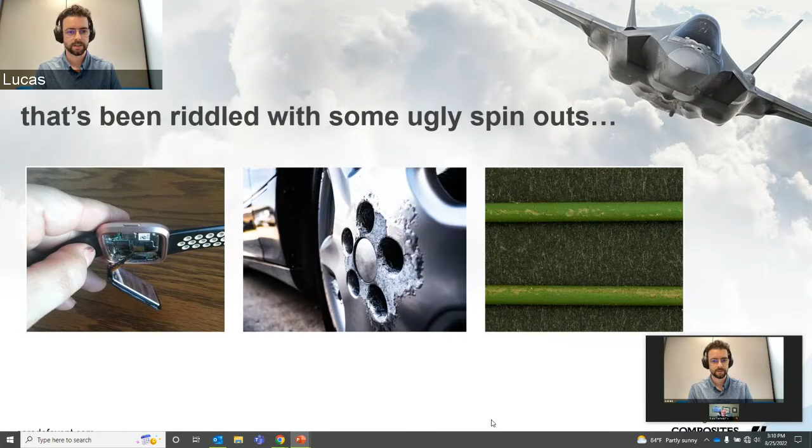This manifests itself in some very real world spinouts. Your smartwatch screen pops off, your newly refinished wheels bubble and don't work anymore, the coating on your medical tube or catheter starts bubbling and peeling off. This is real.

And when this occurs, the Twitterverse is not very kind—the forum warriors, the keyboard warriors go crazy. So even if you have a super small percentage of failure in your overall production run, guess what? That makes it to a pretty unforgiving audience out there in the real world. And it's not necessarily fair to the manufacturer, but it is the world we live in.

So guys go crazy on the forums: hey, my cell phone screen fell off, it's no good. Or, I just bought my new Ford Bronco and I've got this tiny little chip in one corner, and this is crazy—I just spent 80 grand on this thing and Ford couldn't even ship it to me on time. Like, what the heck. So this is what we've got to deal with—that brand image problem, which can be pretty damaging.

So in each of these high profile cases, the issue really isn't a design flaw. It's not that our adhesive bead width isn't thick enough, or that the way we've designed the joint so the load path goes in a specific direction is incorrect.

It's a bonding problem or adhesion failure. It's some failure in the surface, where the surface is different than we wanted it to be at the point in time that we put our coating or sealant in contact with it.

In fact, about 90% of all the adhesion failure issues that we see out there in the world are related to surface problems. And it's not just, hey, we didn't get it clean enough today, or the prep was wrong. There's a human and organizational factor at play.

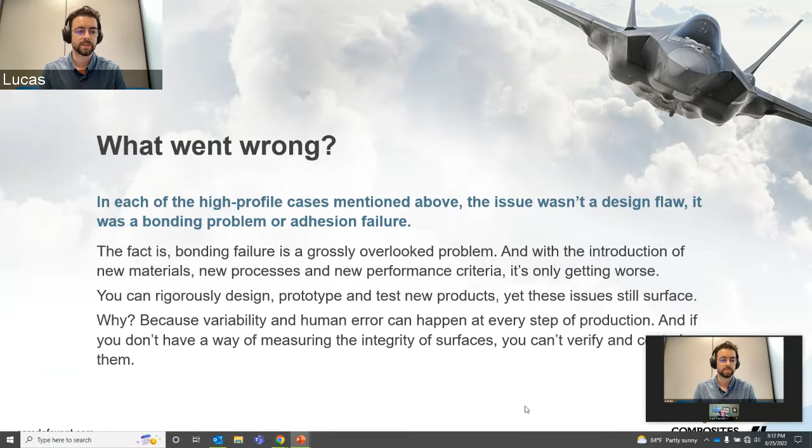So these failures, what do they lead to? Scrap and rework expenses, warranty claims, reputational damage. And then process engineering or quality engineering, sometimes development, are now running around trying to figure out where the cause of this failure is and how to implement a corrective action.

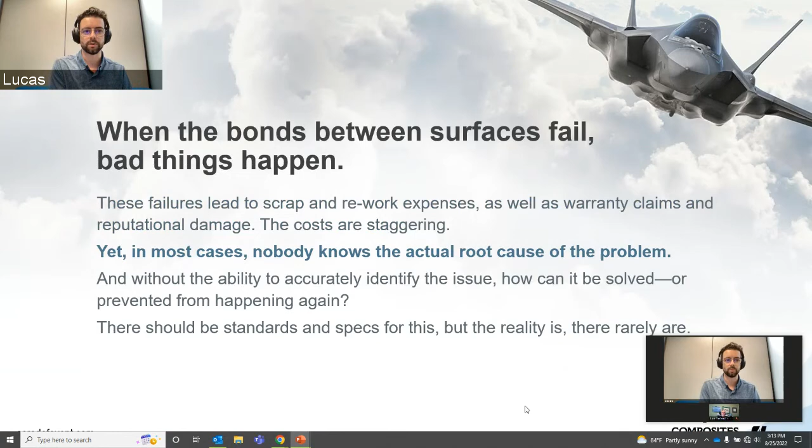Not only that, say I'm the manufacturing or process engineer, I now have to create a large report that takes weeks to deliver to management on what the problem is, what the fix is, and how much it's going to cost to fix it. It's a big time suck away from doing the work we're supposed to be doing, regardless of our function.

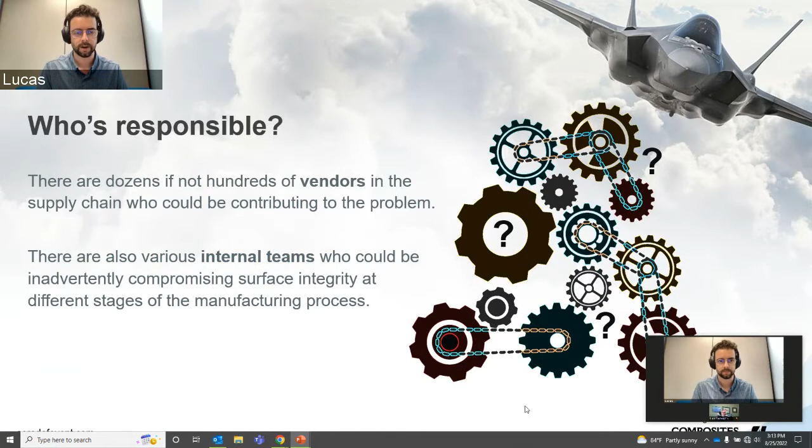Getting to responsibility can be difficult. Who is actually responsible? Is it the vendor? Is it the shipping company? Is it the receiving guys in shipping that left it sit on the dock during winter? Who owns this problem? We want to avoid finger-pointing situations like this.

So the visibility to the issue for surface chemistry, plus the experience to know what to do with that information, is what we call surface intelligence. There are new tools available, new analytical capabilities, and expertise available that can give us insight and the ability to monitor and analyze these variables in real time.

It can give us the ability to increase control over our processes. It gives us a common language to talk about critical adhesion issues across the organization, which we find to be a major barrier, especially with a globalized supply chain. And then the ability to not just diagnose and fix them, but actually prevent these problems from happening in the first place, which really starts on the development side.

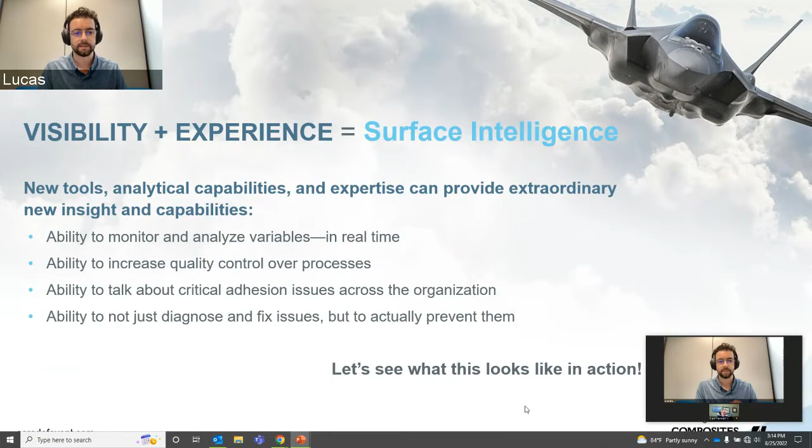So let's see what this looks like in action.

What's really important to think about is we've got three key inputs to a reliable coating, sealing, or bonding application. It's the chemistry we're applying to the surface. Is it correct? Usually the Henkels of the world, the Solvays, do a very good job controlling monomer ratios, and they're not shipping out bad batches of adhesive or coating too often.

Almost never. We have to control the second input, which is how we're going to apply that chemistry to our substrate - the cure profile, environmental conditions, fixturing, pressure. There's a lot of physical and mechanical things there that need to be aligned. The third thing is the substrate we are going to apply that coating to - do we have the right surface chemistry to play well with what we're putting together?

So if we do those three things, we're going to get a reliable and repeatable output 99.999% of the time. It is going to work as designed, right? So that's very important.

Manufacturers do 2 out of 3 pretty darn well. The Henkels and Solvays of the world do a great job controlling the product they're delivering. We do all kinds of monitoring around fixturing and environmental conditions when we're actually applying that - cameras behind robotically deployed sealant to make sure bead width and color is correct, mixture nozzles, all kinds of stuff. But we're not really tackling surfaces.

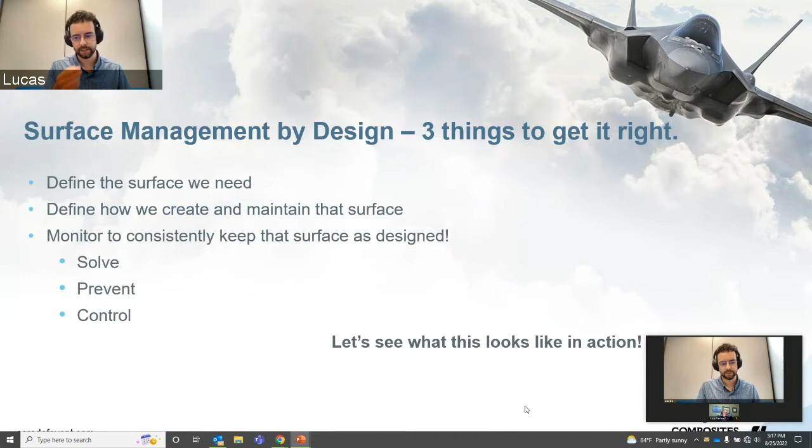So we've got to be able to solve for the problem if it occurs. We want to prevent it from happening in the first place, and we've got to have a good control plan in place. So let's get into some of the chemistry here and what's going on with these surfaces as a whole.

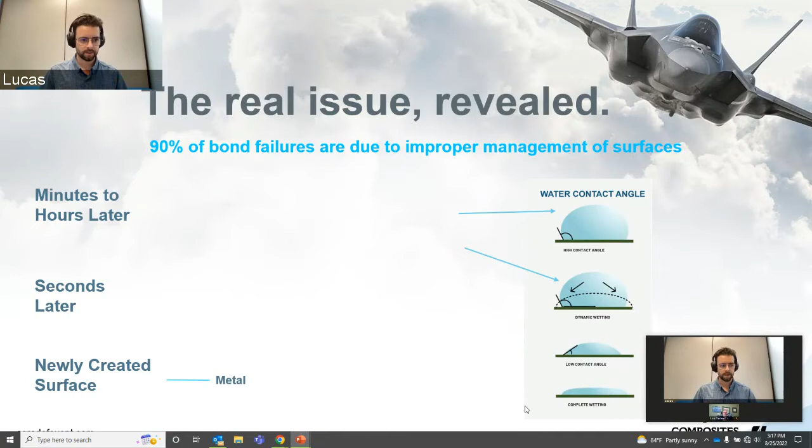So, what is a surface? We've got to define what is a surface for these applications. A surface for a bonding or sealing or coating application is basically the top 2 to 10 or 20 molecular layers on a given material.

If I can see a fingerprint on that surface, that's like 10,000 molecules thick. The region that we care about is totally invisible to the eye.

What we're showing here in this diagram, just using metal as an example, when I create a metal surface, say through machining or abrasion or laser ablation, I've fractured molecular bonds. I've literally ripped some portion of the bulk material apart, and now I've got all these reactive sites.

Within milliseconds, I get an oxide layer that forms, I get some water vapor that gets on there, and then eventually I start getting some contamination, some adsorption from the environment or from handling, usually in the form of hydrocarbons. Every time a molecule comes in touch with that super fresh surface, you lose some of that reactivity.

You lose a reactive site, literally used up. You got nothing to work with there.

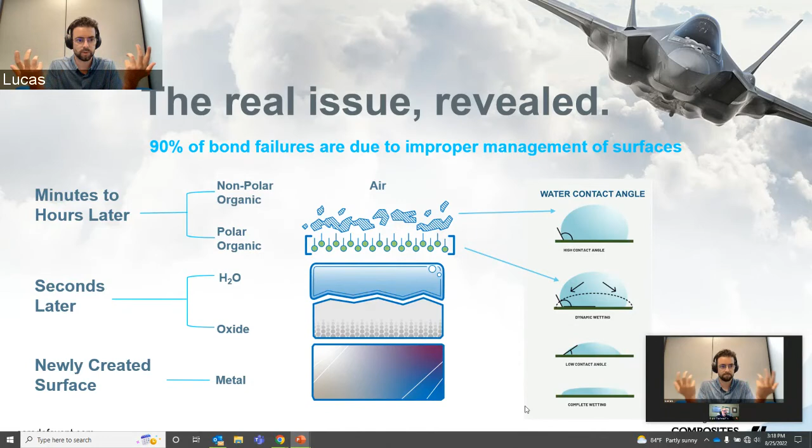The jargon that you'll hear as you go out and research around this is the term surface energy. And surface energy simply is a phrase that describes the total amount of chemical reactivity that's present on a surface at a given point in time.

Certain materials natively have more surface energy than others, depending on their chemical makeup. Crystalline materials, glasses, ceramics, metals, they tend to have a lot more energy. That also has to do with specifically what they're made up of, than, say, polymers. And polymers follow a little bit different scenario.

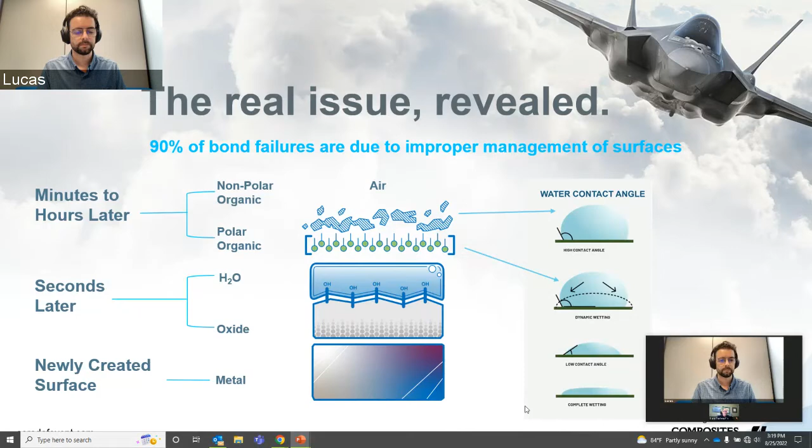So every material goes through this decay curve. I've got surface energy on the y-axis as a function of the elapsed time from surface creation on the x-axis. When I create that fresh surface, and if it's a polymer, it's typically through surface treatment.

If it's a metal, it's typically through cleaning or abrasion or something like this. I'm going to start with a relatively high energy level. It's going to immediately start to decay.

At some point, it decays so much that you don't have much there to work with. You don't have much reactivity for your adhesive or your paint to even appropriately wet the surface. Where that is, is system dependent. How fast this happens is material and environment and system dependent.

That's the answer for everything. Every engineering answer is 'it depends' to every question. But this is very important to understand: where are we on this scale? Where do we need to be?

This gives us a baseline to function from. When does my system work? When does it start to kind of get iffy? When does it start failing completely?

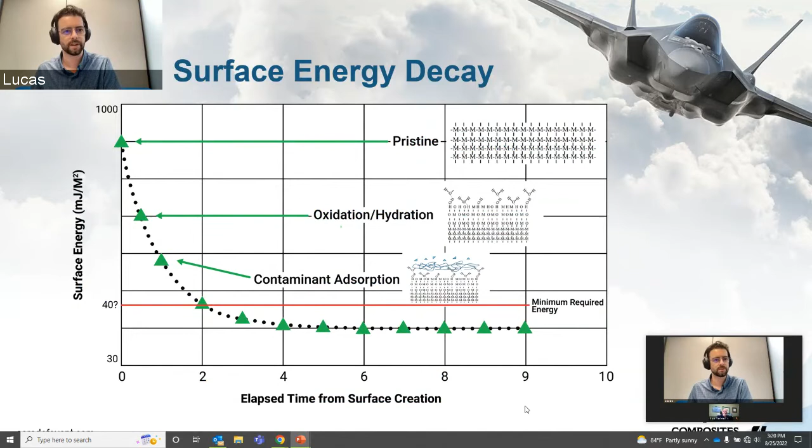So let's take a look at polymers here. When I'm creating a polymer surface, it's pretty different. If I've got a bulk polymer that I pull apart, essentially two things can happen: I get some chain scission, or I can get chain pullout.

But there's fewer broken bonds. There's low chemical potential, low reactivity on these surfaces. They don't have much reaction to the environment. They're fairly stable.

But to be able to do something with them, we typically have to do surface treatment. Could be a plasma, could be a flame treatment, could be a corona treatment. Sometimes there will be primers that we'll use to help try to do this.

They also have high molecular mobility, so substances can really diffuse from the bulk up to the surface, like low molecular weight material can be a real problem. And that actually can be a real killer that we'll see a lot in, say, molding operations

or film operations. So it's a little bit different setup. The surfaces of these things basically look like spaghetti. There's not a whole lot to work with there unless you do something to it.

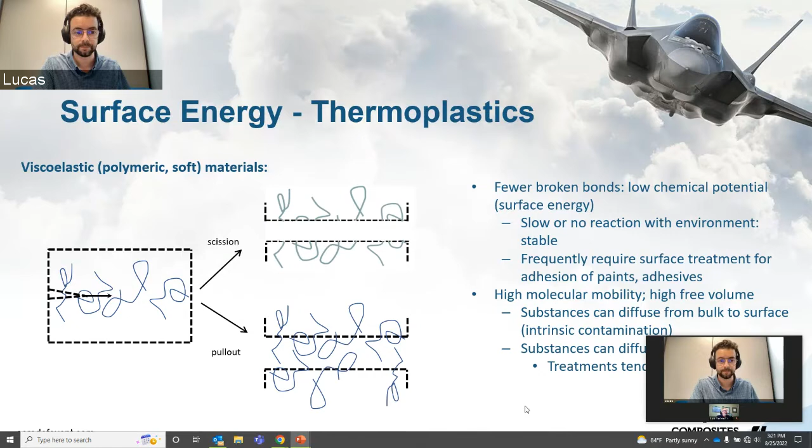The decay function here looks a little bit different because you're starting from a lower surface energy to start with. You surface treat, typically, and that increases its surface energy. And then again, it decays over some period of time.

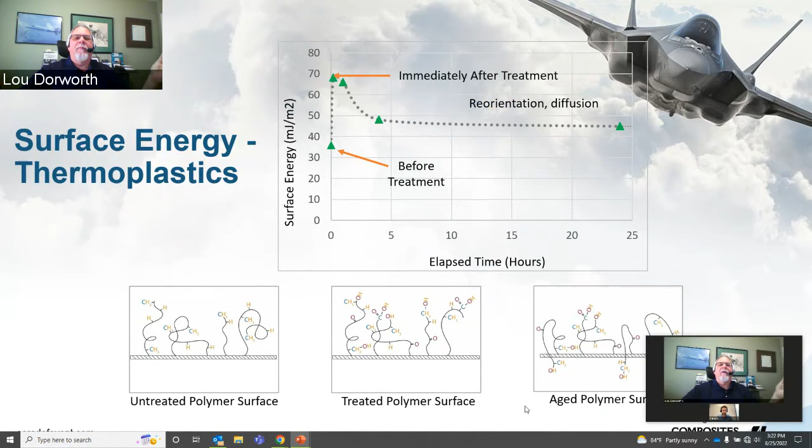Lucas, can you discuss thermoset polymers compared to thermoplastics? Thermoplastics have much lower surface free energy, so we're dealing with something slightly more than that, but still much lower than any metal. Yeah, much lower than any metal. So great question, Lou, probably one of the better questions I've ever gotten on a webinar.

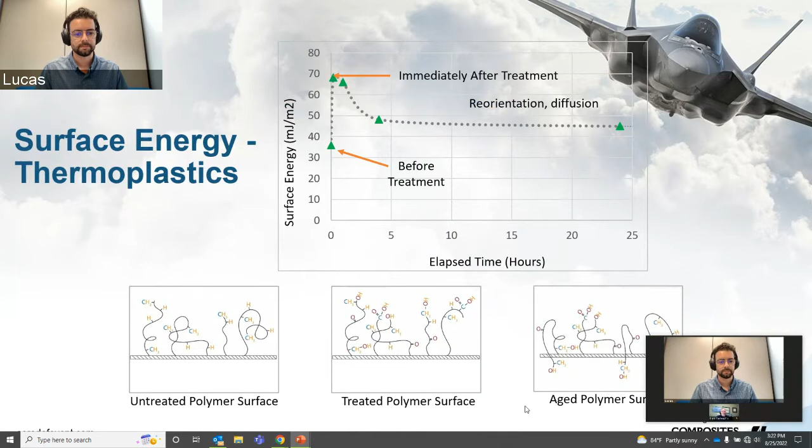The other thing you need to worry about with treatment is you can create reactive sites on the surface, but they can reorient down into the bulk. Now, to Lou's point, that's really related specifically to thermoplastics. But it's something to keep in mind. The point here is that these things are sensitive.

It's a super thin region and it's mobile. Things are changing all the time. So a surface that we care about for these applications is quite thin, invisible to the naked eye. Surface energy gives us a way to start describing how these things move around or how they change as we do preparation or cleaning. But how do we really measure them?

Traditionally, we've got a couple techniques. We've got FTIR. We've got vacuum techniques like XPS, X-ray photoelectron spectroscopy. We can do some chemical residue analysis, through say solvent extraction. We can do wetting methods like contact angles, and we can do surface roughness analysis.

Now, a lot of people do roughness post-prep because the common wisdom is we need to roughen surfaces to get good bonding. It tells us nothing about surface chemistry, simply tells us if we hopefully got the surface a little bit rougher. It can be important, but usually a secondary effect for bonding, not a primary effect.

The challenge with some of these, of course, is that things like FTIR and XPS are laboratory techniques. We can't deploy them out in the field. You need to have a really trained operator to be able to use them. You can get great information out of them, but they're not super practical on a day-to-day basis.

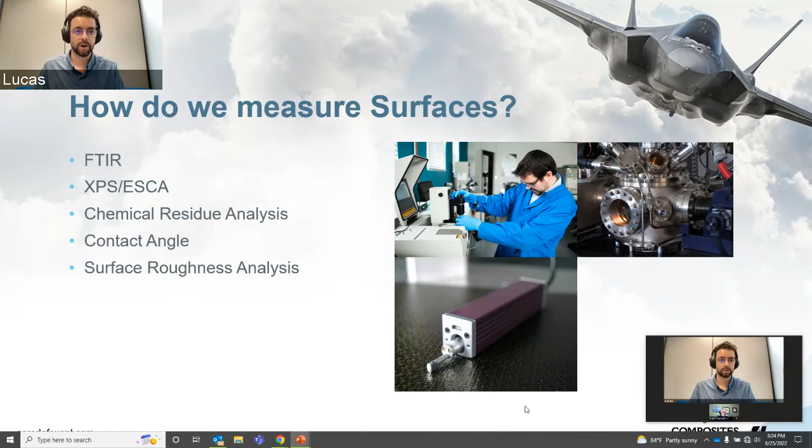So we've got another poll here. How are you guys measuring surface chemistry today? You've got about 60 seconds on this. Do you guys have access to FTIR? Is there an XPS around that you get access to? Contact angle, chemical residue, surface roughness, or are you not measuring at all? And how is that working?

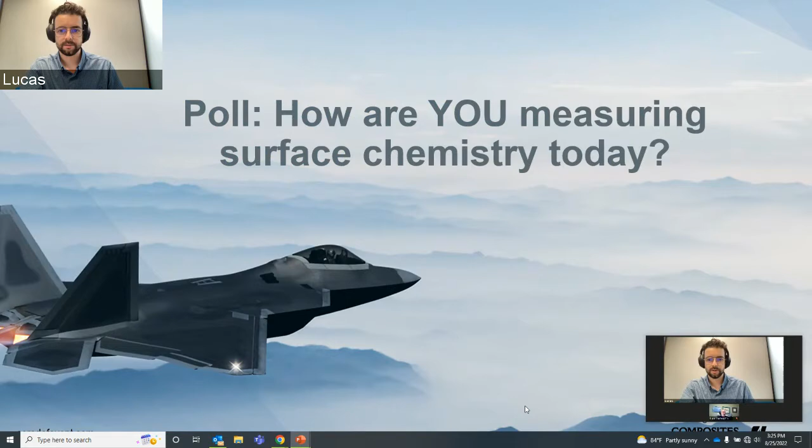All right, okay, we got 4 votes for chemical residue, 0 for XPS, one vote here for FTIR, and a few for we don't measure. Good, thanks everybody for answering that.

Okay, a couple things to consider with some of these measurement techniques. The FTIR technique matters.

Most people that have access to FTIR are doing ATR. It can be good, good for compound identification, but the problem with ATR is you're sampling down in the bulk material, like a micron or two. So it's actually not telling you—if you remember, we really care about the top 1 to 15 to 20 molecular layers of that surface.

ATR samples too deep. You can use grazing angle spectroscopy, but you need a reflective plate, so it requires you to basically wash a part off in solvent, collect it on a reflective plate, and then you can get real thin film analysis on what's there. So it can be great, can be quick, but not always the way to do it. Almost everyone's trying to do ATR, but it's not really even sampling the region that you care about.

Another thing is SEM.

A lot of people have access to SEM. You get these incredible images. I don't know if folks here have ever seen those insane images of an ant head, black and white or green, where you can see the individual hairs on the ant head. Those are done in SEM. It's always awesome. A lot of SEMs now have an EDX attachment, which can give you bulk elemental composition. But again, you're getting like 2 microns down into the surface, so you're ignoring that actual region that you care about a lot.

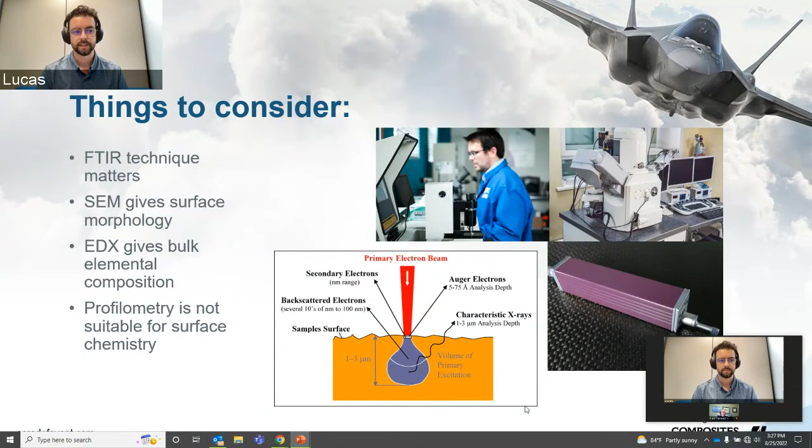So let's talk wetting measurements. These are the most deployable in manufacturing. They're literally the easiest to use. Traditionally you'll see dyne tests done a lot in polymer processing, like film processing and molding. Dynes have been around forever. Inks have different surface tensions. You paint them on the surface, count to five, and watch if they bead up or wet out a bit, to get an indication of the surface energy of the part.

Water break check is basically the most ubiquitous way for the aerospace industry to understand if they've got clean metal parts prior to PAA, and prior to a lot of different things, but many times prior to coating or metal bonding. Very much a binary, go, no go. Usually the company's relying on maybe someone named Todd and someone else named Sarah who've been doing it for 35 years and they trust them. So it's certainly subjective and certainly not a 21st century solution.

And then more and more people now are starting to use water contact angle, because this is a way to get to a quantified water break, which allows you to get a lot more accuracy, sensitivity, and flexibility, and gives you data, something I can port into a computer and start graphing. So it's absolutely the way to start looking at it.

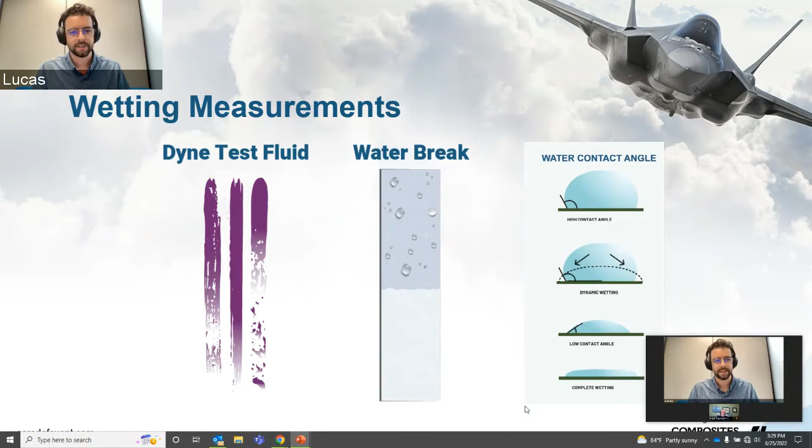So let's look at some of these deployed. Typically, surprise surprise, we do make some of these. This is one of the things we do. They come in handheld versions, they come in automated versions. We won't spend any time on this at all, but we will get into the data next.

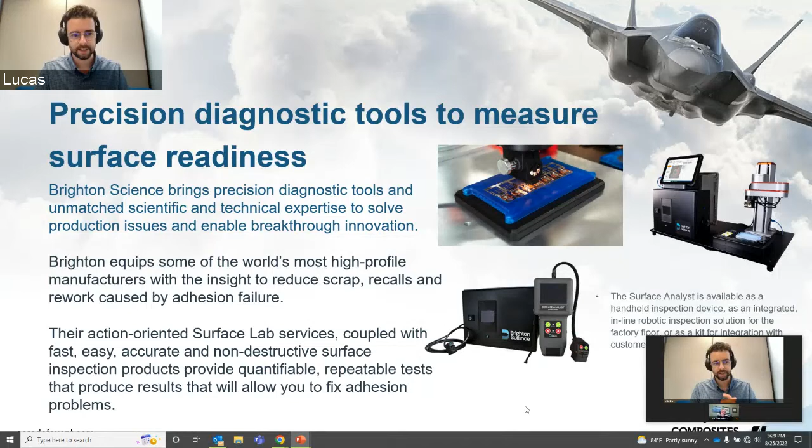So why do we like the water contact angle technique? One, it's sensitive. It is as sensitive as XPS. It's literally the most surface sensitive technique available today that I can just deploy on anything, anywhere, in atmosphere. As an example, here we've got some nickel alloy that's dirty. It's going through a stamping process. It's dirty. The manufacturer here is trying to evaluate: I need a new way to clean this that's environmentally friendly. How do I know that this new solvent package is going to work for me?

We can get to a very objective measurement of metal cleanliness here by creating a carbon and nickel ratio in our XPS system, and we can correlate that directly to a water contact angle result. That carbon and nickel ratio is basically how much carbon signal we're getting in relation to nickel on that surface. You can see when I'm at an 80-degree contact angle on the right-hand side of the chart, I've got a very high carbon to nickel ratio. As I start cleaning this nickel through different techniques, my contact angle goes down, down, down, and my carbon to nickel ratio goes down. It's pretty darn close to a 45-degree line. It doesn't get much better than that.

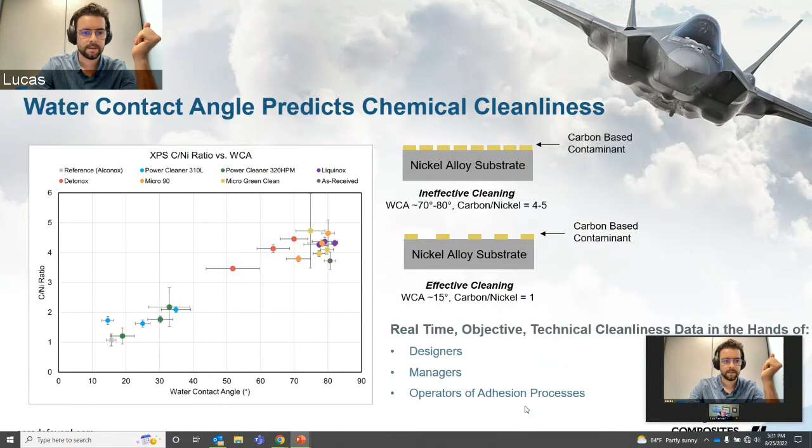So one of the reasons we like this water contact angle method is that it's sensitive. It's accurate—it tells us when our surface is changing, which is really nice. It's not just for metals, though, as we'll see here in this next slide.

As you'll see in this slide, we can map our contact angle on the y-axis as a function of the atomic percent oxygen that we're putting onto this polyethylene through plasma treatment. Very similar curve shape, right? So we get this in two seconds, and it's super sensitive and super accurate, and anybody can do it. So it's a very nice thing.

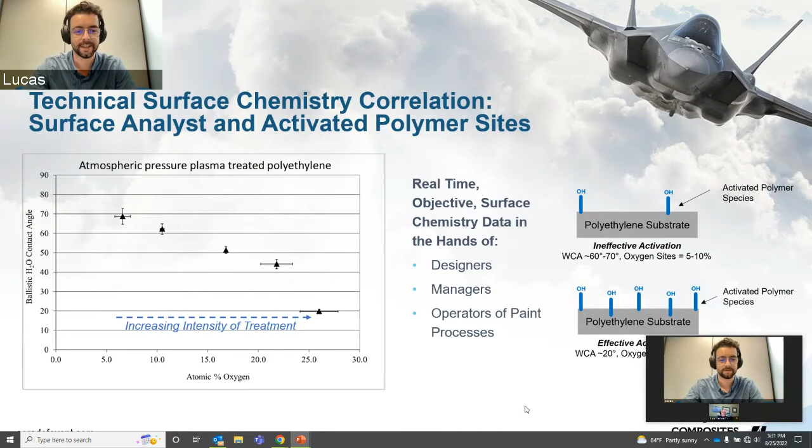When we start putting this to practice in two ways: one of the things we look at is its sensitivity to contamination, as well as how we correlate our surface chemistry, our surface condition, to bond performance, to the fundamental performance of the joint.

And we end up getting charts like this, which give us a lot of confidence that if we design our process well to create a particular surface chemistry, part after part, shift after shift, operator after operator, that gives us a very specific water contact angle band that any movement in that band can alert us to when things are moving out of spec.

Just like we'd put a torque specification on a fastener, we can put a specification on surface chemistry for the factory. On the left-hand chart, we're showing the technique sensitivity to silicone. Silicone is probably the worst contaminant you could have floating around in a manufacturing facility that's doing bonding, painting, or sealing. It's insidious. It's everywhere.

It's in your lotions. It's on people wearing—I guess not many people wear Livestrong bracelets anymore, but it's in your Apple Watch band. It's all over the place. People buy silicone gloves, walk into the plant, and open up the box on accident, and all of a sudden now you've got silicone floating around.

The chart here on the left shows we've got our water contact angle on the left axis, the amount of silicone that we're applying to composite samples on the bottom axis, and then the atomic percent silicone on the right axis. And so what you can see here is once we get to 10 micrograms per square centimeter, we're up above 40 degrees.

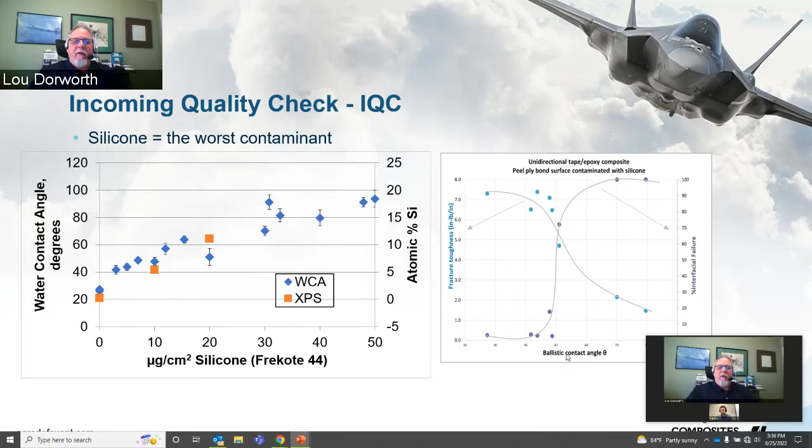We're using Frekote 44 here just because this is what we used in the experiment—it's easy to apply for the experiment. In this case, we're just trying to understand, what's the sensitivity of the technique to contamination, and what's the contaminant we really care the most about? Well, it's actually usually not hydrocarbon based contaminants. It's almost always silicones.

Now, every application is different. If I'm doing precision machining and cleaning of a medical implantable device, I also care about hydrocarbons, and I'm looking at a whole different level of clean. Yeah, that's how I would answer that.

Right, thanks Lucas. It follows along with our observations. On the right hand side here, we've got a chart where we're taking these samples and correlating the bond performance. Our contact angle is on the bottom axis, fracture toughness is on the left axis, and on the right axis we've got percent interfacial failure.

I saw Doug Decker was here listening today. He's seen this chart before, and it's a really good one, because what happens is that as we add contaminant to that surface and our surface energy decreases and our contact angle increases, what we see is our fracture toughness decrease.

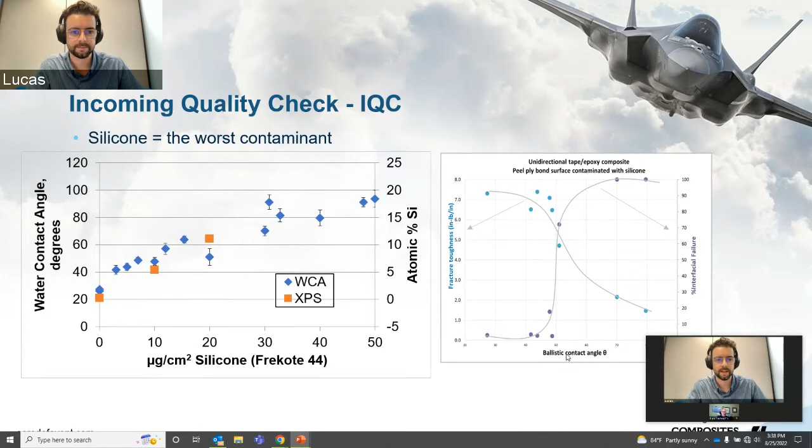We're going to be able to quickly screen technology options, right? What solvent package? Am I using plasma? Am I using a Scotch-Brite? Am I using a 220 grit? If I use a 220 grit paper, can they get anything from Home Depot, or do I need to actually specify what paper they're going to use? I won't spoil the answer of that one.

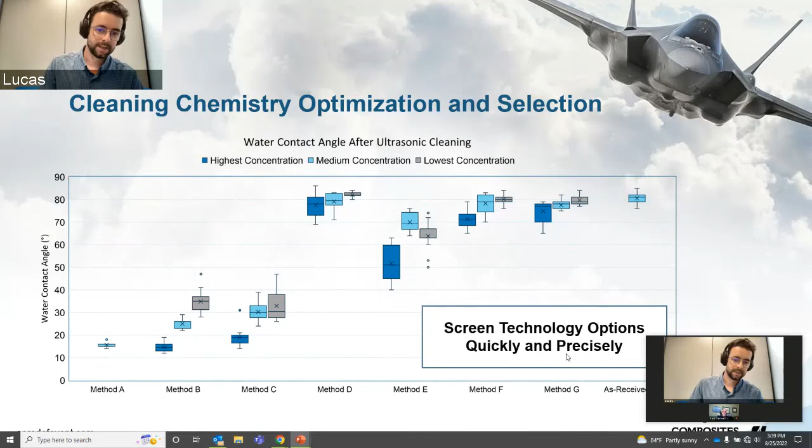And finally, the thing that we get really excited about, because this gets us to our prevention piece, is providing a data stream, right? Considering this is aerodef, and let's make an assumption that some of our attendees are in the aerospace industry, when we talk about digital thread, digital twin - this is where that comes to practice, this is where it comes to life. We get a data stream in the factory at the point of application for what's going on with our surfaces.

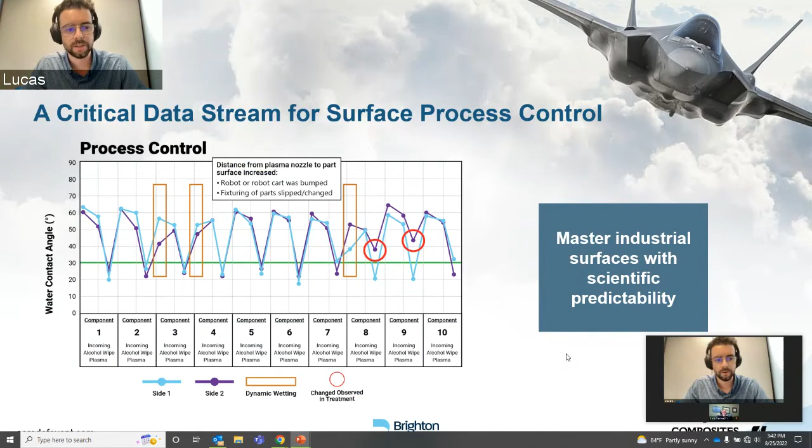So here we get to not only quickly scale a process that is doing things to the surface that are invisible to the eye, we get a more reliable assembly. We're solving a problem super quickly that would have gone undetected otherwise. And we get a critical data stream that's alerting, in this case, our advanced manufacturing engineers, that this is happening before it becomes a much bigger problem.

So we're going to tell two stories, and then we're going to start wrapping this up. A way that people are putting this surface intelligence data to practice. One of them, enabling a process development team to really overachieve deadlines.

Here we've got an automotive manufacturer developing a new electric vehicle. We had 4 months to select a cleaning process for wire bonding of the battery module. Wire bonding is very sensitive to metal cleanliness, so we've got to get something that's repeatable. If anyone here has looked at a Tesla battery pack, it's almost impossible to avoid these days - it looks like basically an array of double A's, and they've got to do wire bonding to each cell. That's got to be legit.

So we worked with them to quickly select methods, test, develop a spec, and then provide test results to correlate to what they wanted to ultimately select, which in this case was a plasma cleaning step - highly automatable, good for this kind of application. In half the allocated time, we were able to nail the process and say, this is what we're using, here's the spec, manufacturing team go ahead and start procurement, we can get moving. So we took that 4-month project down to 2 because we had that visibility and experience on what we needed for the surface.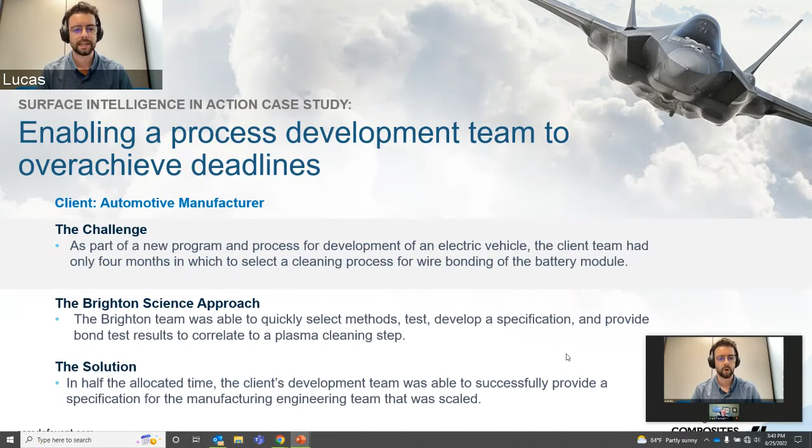This is one I like, near and dear to my heart - mitigating risk and changing human behavior with surface intelligence. This human behavior angle is so key, and anyone who's been around for a while knows how hard it is. They could probably count on one hand how many times it's been done successfully, and on all their fingers and toes how many times it's been done unsuccessfully, if not more. The human behavior thing is super important, but we don't get to change that without data and visibility as to what's going on.

What we did in this case is we went and started gathering data in the cleaning procedures during every shift, first, second, and third, to see what was happening. And what do we find? Third shift was deviating from the prescribed standard operating procedure - they were reaching for a different cleaner instead of the prescribed one. It was out there on the cart, it was available, it wasn't what they were supposed to use, but it's what they were using.

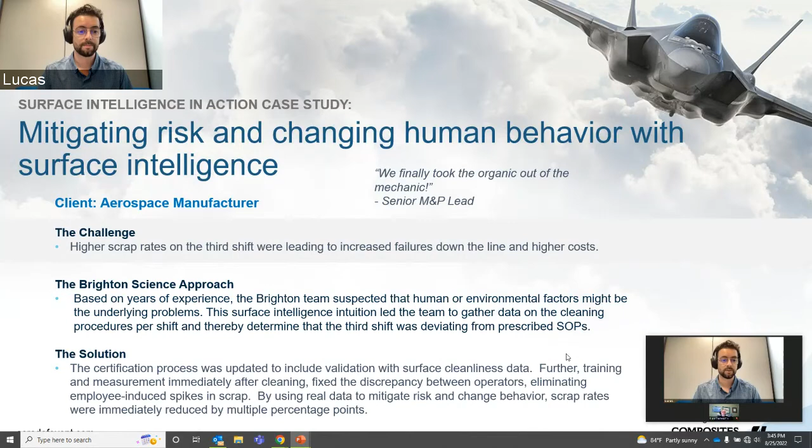So we discovered that after a week, and what we did is we helped update the certification process. We included some validation so that operators had to self-validate how they were doing the procedure. We also implemented better training and measurement for people coming into the factory, as they're having, like many people, a lot of labor turnover. This really eliminated the discrepancy between operators - Christine was doing the exact same job as Jim now, no matter if it was first shift or third shift, cleaning to a number. This eliminated employee-induced spikes in scrap because we could use real data to do this.

So surface intelligence, what's it allowing companies to do? Solve issues very, very quickly - upstream contaminants, non-optimized parameters in your preparation methods for a primer application. It enables a supplier to meet whatever your cleanliness standards are from the OEM. So we aren't operating in the world of mutual mystification - we've got a number that we got to hit, and a common language that we can deal with.

There's prevention too - we get to educate and train users on materials, cleaning, uses. We get to predictable models for adhesion success. Hey, if we get these three inputs right, how confident are we it's going to work the way it's designed?

We also get to develop SOPs for workflow and processes, which is one way we get to prevention. Then there's the control piece, right? That digital thread, that digital twin.

It gives us a dashboard to show quality managers or process engineers how processes are in control. We can do reporting, either to other teams internally or up and down the supply chain as needed. We can actually identify opportunities for training based on those dashboards.

Just like we have many KPIs that measure different business functions or different role functions, we now get to apply that same methodology to something that has heretofore been completely invisible.

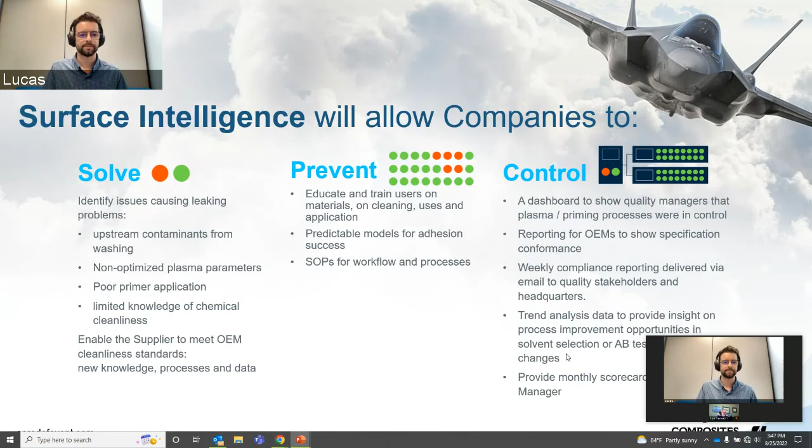Managing surfaces from supply chain to shipment is important. We call them critical control points. We've got the incoming material, the storage and inventory, the way we're going to clean it, whether or not we're going to surface activate, and then the application of our sealant, coating, adhesive, etc.

We don't always measure all of these. We measure it where it matters, but having a baseline data set for figuring out what these are supposed to be allows us to really rapidly uncover problems if we encounter them.

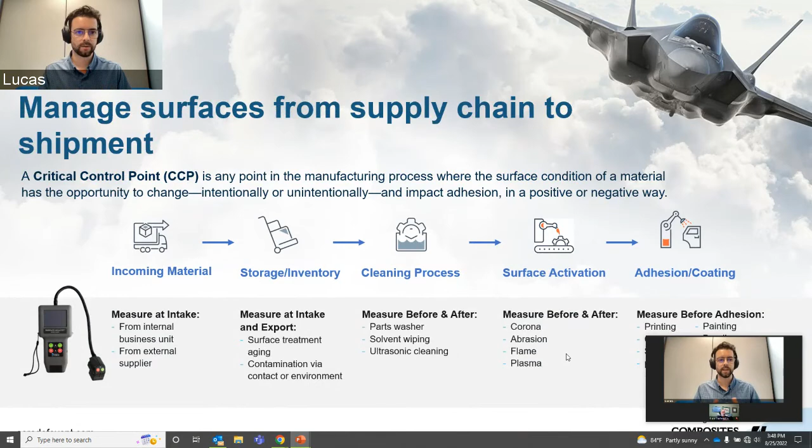We talked a little bit about designing surface management into the entire product development process or product life cycle. There are various areas where applying surface intelligence really matters, from product design all the way through process optimization, maintenance optimization, and yield optimization.

We want to be able to make sure that a program that we launch is not only going to be on cost, on spec, and on time, but have the utmost quality possible.

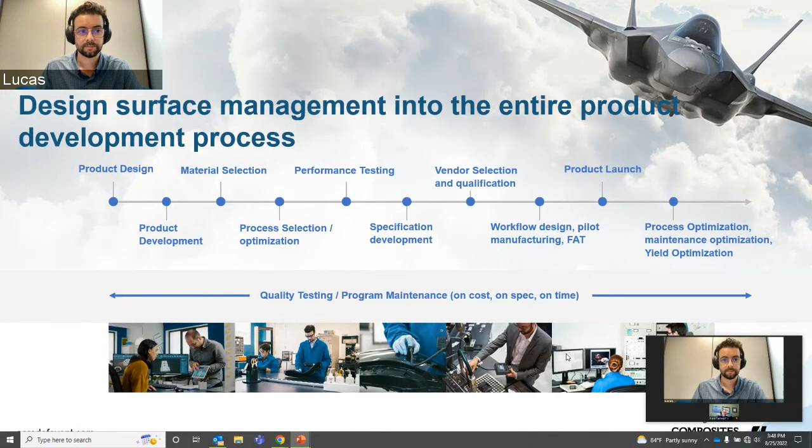The race to the future is on. It's time to take the lead with this. We can start eliminating these failures that we were talking about from our lives. They don't have to happen.

The Fitbit watch is not a problem. The Google phone is not a problem. The medical catheter coating is not a problem. Or say if we were to look at the transportation industries, these start going away. These are all just the stuff that today, every week, we get a new little headline around a delayed launch or recall or something like this.

These are really truly preventable through the application of a surface intelligence methodology.

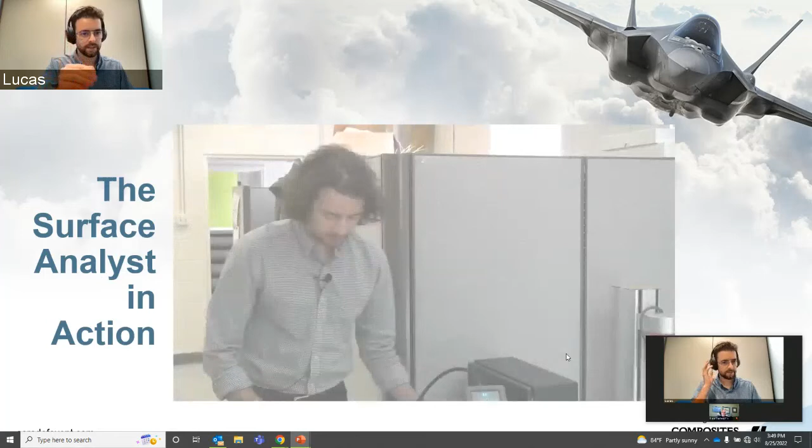So let's see it in action. We got a quick video here, super fast demonstration, at least of the surface analyst. You're going to have to avoid the evil twin. Pay no attention to the evil twin with the quarantine here.

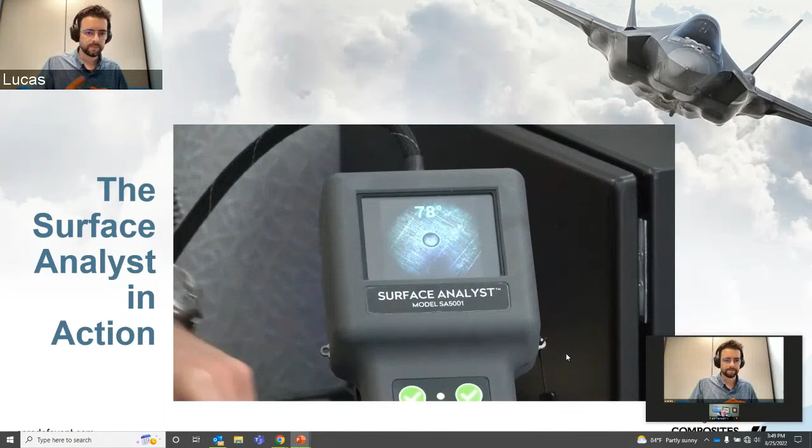What we're doing here, I'm going to narrate because it's going to be silent for those on the webinar. We're measuring a piece of aluminum before. We get a 78-degree contact angle. That means that water droplet is really beading up, not very attracted to the surface. It's more attracted to itself.

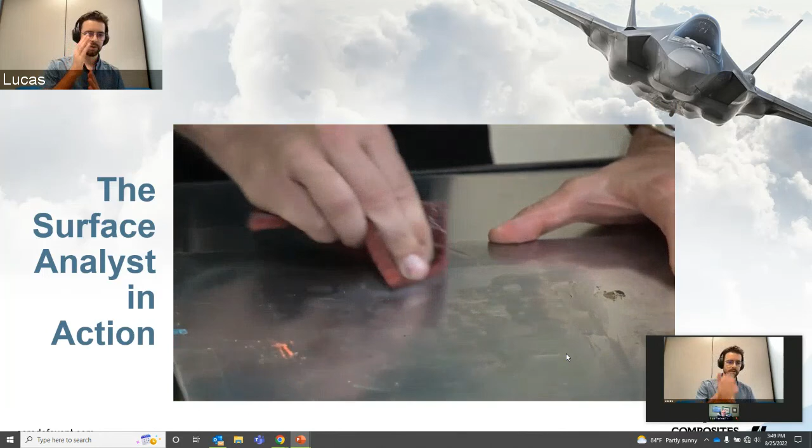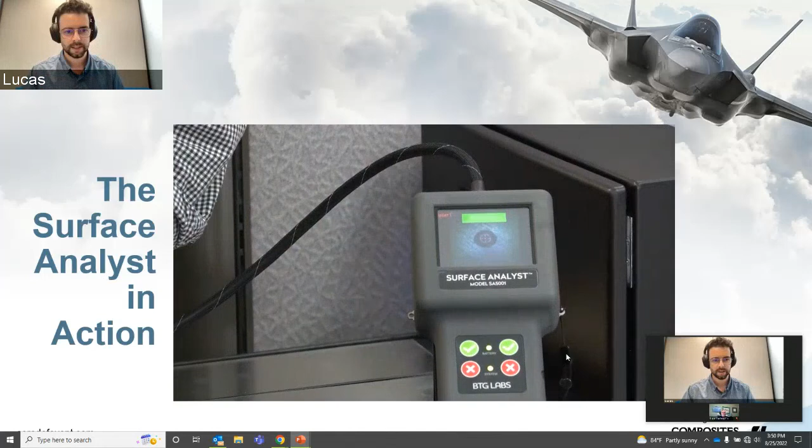We just take a little piece of Scotch-Brite. This is obviously just a funky scrap piece of aluminum. We take a piece of Scotch-Brite, we take a measurement on that surface after we Scotch-Brited it. We get a 23-degree contact angle. So we've gone from 78 degrees to 23 degrees. Super simplistic demo, but gives you guys the idea of just how quickly I can now validate and put a number to what I've done to that surface.